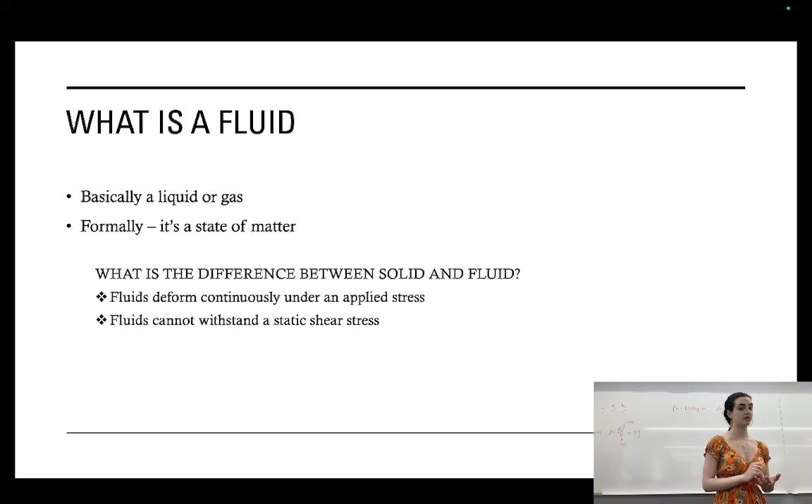Okay, so important concept number one is that fluids deform continuously under an applied stress and they cannot withstand static shear stress. So shear stress is a really important concept for the first part of this course. So yes, what is fluid? So then we get into fluid properties.

So density, obviously a very important one. I wrote the formula up here. Density is the Greek letter rho, so it's kind of like a curvy P. Make sure you make it abundantly clear that it's a curvy P and not a P, because P will be pressure. So make sure your rho is rounded. And that is mass over volume with the units kilograms over meters cubed. So important value, density of water, easy number, 1,000. Keep that locked away in your brain. Density of water is 1,000.

So another fluid property is compressibility. In this course, we treat fluids as incompressible. So you always would assume that, not that deep, just keep that in your mind. There's the formula for compressibility. I don't remember ever actually having to use it, but I guess it's just good to know. Yeah.

Okay, the next one is surface tension. So surface tension is pretty much, if you think about a body of water, the way that the molecules are actually sticking together, and tension is sigma, so it's work per unit area. Yeah.

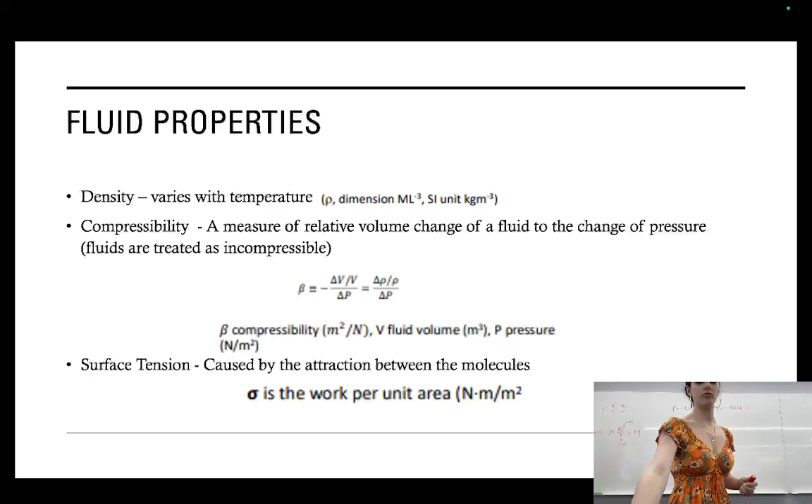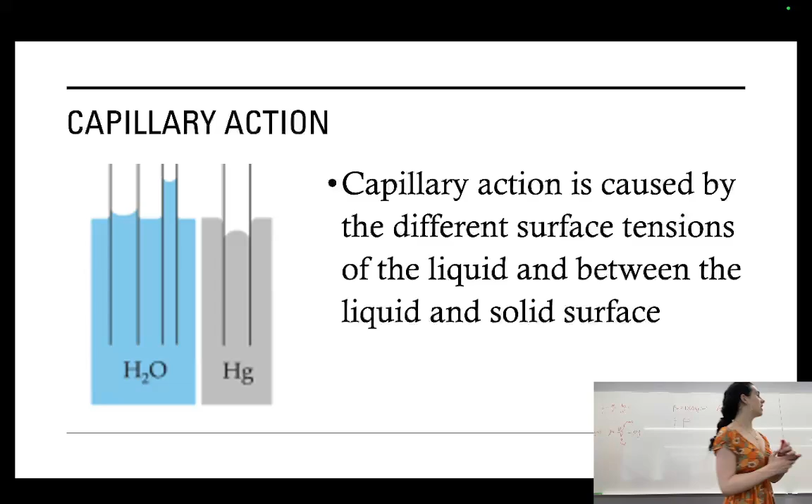So here's more of a theoretical concept, I guess, called capillary action. If you look over here, you'll see with the water, we've got this curve here, right? It's curved upwards. But for the mercury, it's curved downwards. That's because the attraction between the water and the glass is stronger than the attraction between the water molecules themselves. So the water grabs onto the glass. Whereas with the mercury, they're more attracted to each other, so they pull downwards and create this little curve here, like a frown face.

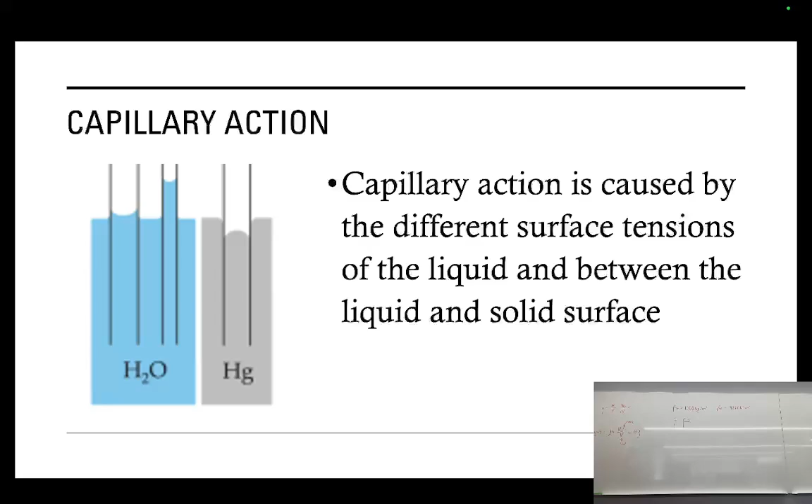So yeah, it's caused by the different surface tensions of the liquid and between the liquid and the solid surface. You won't ever really need to apply that, but it's an important concept to understand that just because something's a liquid doesn't mean they're all going to act in the same sort of way. But you're mainly going to be dealing with water. We're not dealing with mercury flowing through pipes.

So the first important concept with formulas you'll actually use is viscosity. The formal definition is that it's a measure of a fluid's resistance to flow. The most common example would be water and honey, right? Both liquids, but if I pour water, it's just going to come straight out. But if I start to pour honey, it's going to fall at a slower rate. And that's pretty much because there's internal friction.

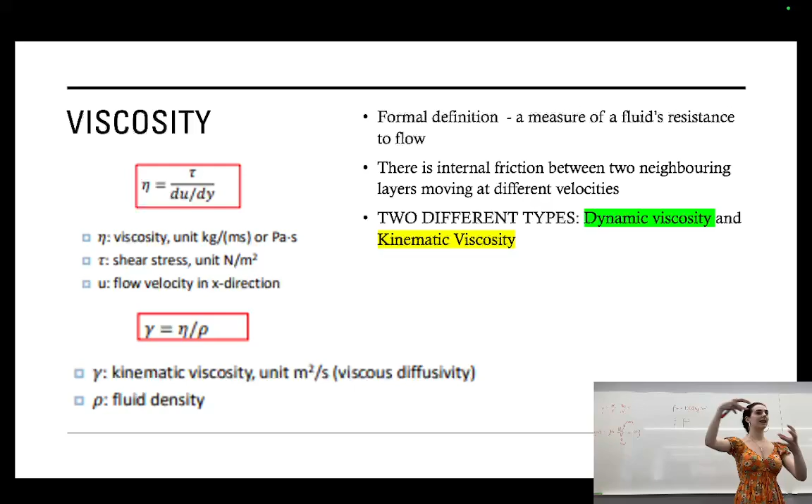And what I mean by internal friction is that within that section of liquid, the layers of the liquid, think about the fact that honey is sticky, right? The layers of honey are literally sticking to each other. So when they're falling, there's more friction, so it's happening at a slower rate. So there are two different types of viscosity that you're gonna see.

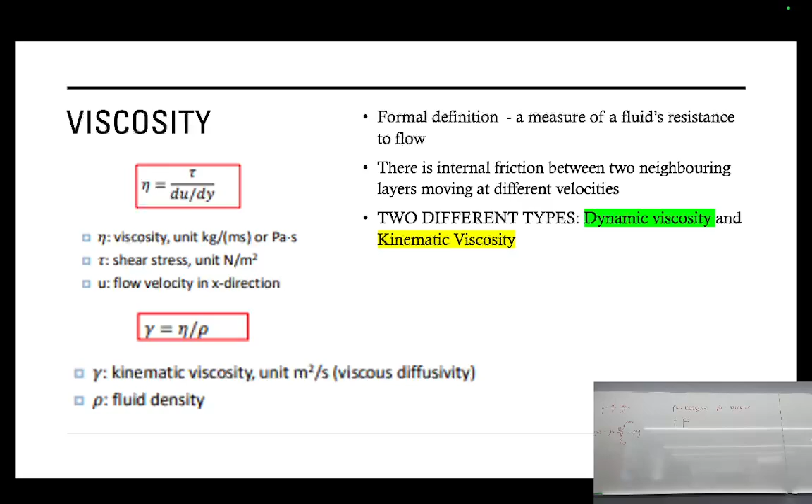The first one is dynamic viscosity, and you do need to know this formula. In this case, this formula's got it as a Greek letter, eta, but it can also be written as mu. I think on your formula sheet it's mu, but don't be thrown if you see that, it's the same thing. So dynamic viscosity is shear stress, tau, over du/dy. And then we've got kinematic viscosity, which is the dynamic viscosity over the density. They're not particularly difficult formulas, but you do need to know them.

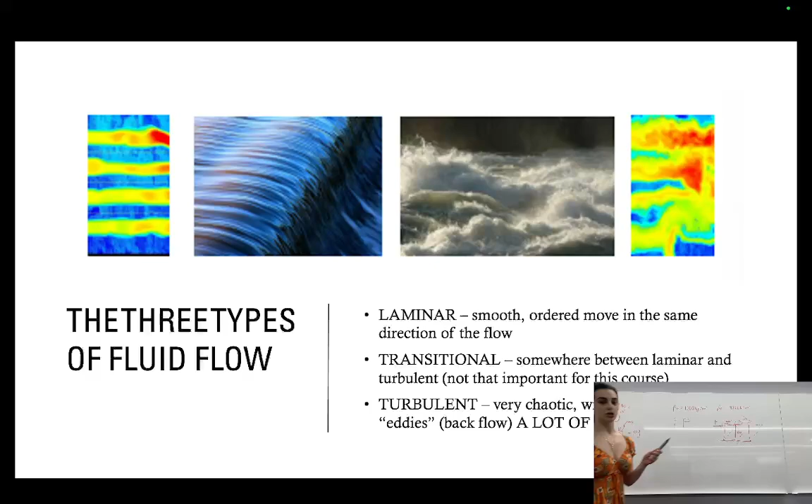It's pretty chill. Okay. So you can have different sort of scenarios. You can have, like, pretend this is a fixed plate up the top here, a fixed plate down the bottom here, or maybe just a plate in the middle. There are a couple different scenarios you can get, but overall it's not particularly difficult. So now there are 3 different types of fluid flow.

So they are laminar, transitional, and turbulent. The 2 most important ones are laminar and turbulent. Transitional is a bit weird. In terms of smooth flow to turbulent, if it's a range, it's quite a small middle section, and the math for it is really complicated because at what point is it really transitional. So you won't get a question on that, but it's important to know that there does exist a middle between laminar and turbulent. So laminar flow is this one over here.

So you can see the water smooth, flowing in one direction. There's no mixing. So that's just like water, if you open your tap, flows one direction, smooth, normal water. Then you've got turbulent flow, which would be like whitewash in the ocean, yeah? You can see it kind of curls in, there's mixing, it's all chaotic. Every single particle in that is acting differently.

So one of the key things, you'll learn this at some point, I think it's later in the term, is that we can't properly model turbulent flow on a computer because every single particle acts differently. There's no formula for that, right? So that's why a lot of the math that we do to do with turbulent flow, we sort of generalize it. But it's very chaotic, a lot of swirls, and it's got eddies.

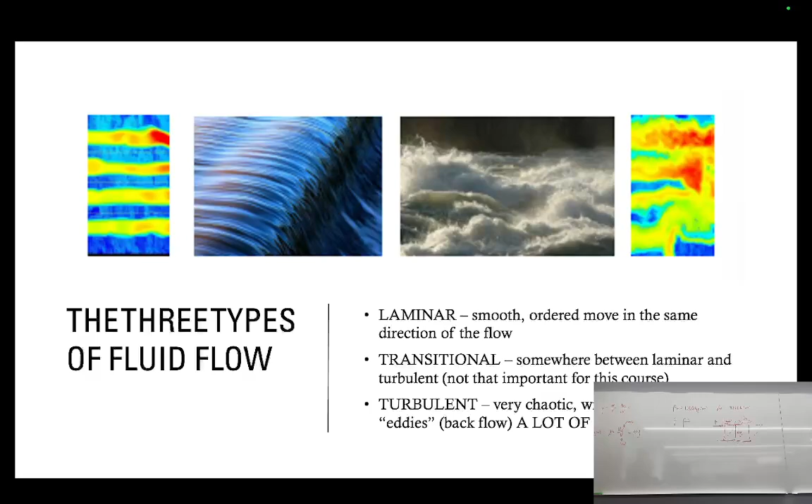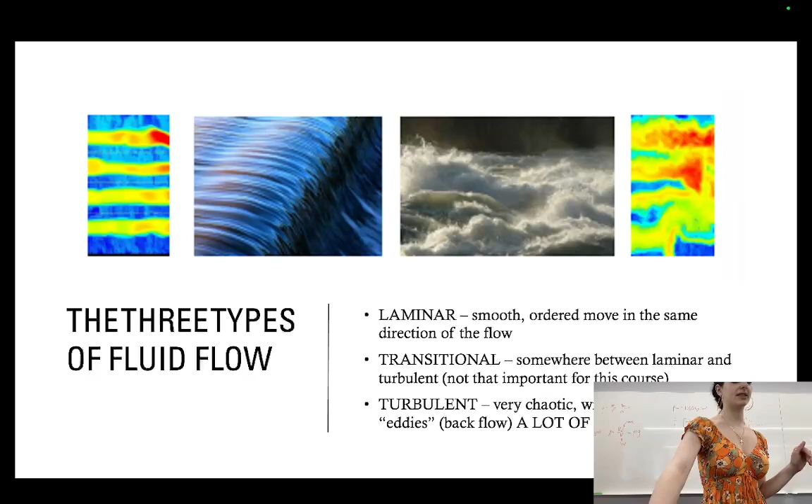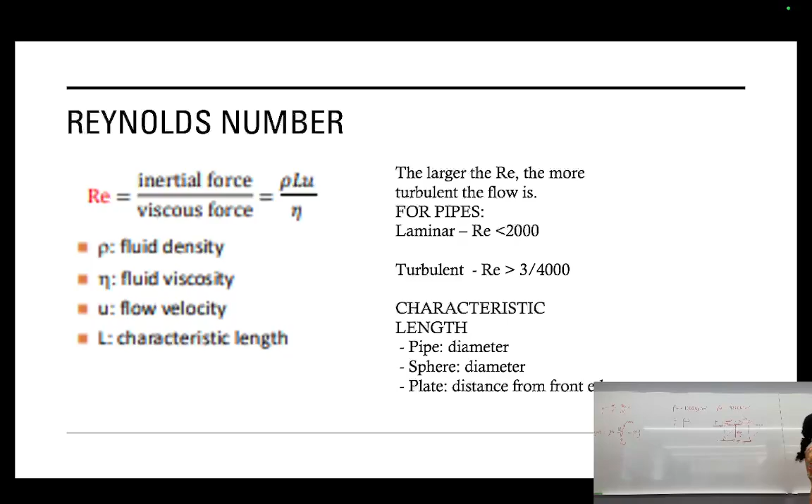So one of the other key differences: laminar flow, no mixing; turbulent flow, a lot of mixing. Okay, here is a very important concept. It's called the Reynolds number. It is pretty much a ratio of inertial forces to viscous forces. That's the theory behind it. What we actually use it for in this course is to determine whether our flow is laminar or turbulent.

Now, if you Google it, there's a couple different values for when something would be considered smooth, turbulent, or all these different ones. General gist is that if your Reynolds number is below 2000, it's laminar. Somewhere above 4000, it'll be turbulent. In your exams, it'll be shockingly obvious which one it is. They're not going to give you something in the middle. It'll be like 1,000 or 500,000. So don't worry, you'll know which one it is. They won't make it iffy for you.

So how do we calculate it? It's this formula over here. It's fluid density times flow velocity times something called characteristic length, which I'll explain a bit later, over your dynamic viscosity. So that is how we calculate Reynolds number.

Characteristic length, that depends on what shape you're talking about. So if you're talking about a pipe, it's your diameter. If you're talking about a sphere, it's also your diameter. If you're talking about a plate, it's the distance from the front edge. So what I mean by that is if we have a plate like this, and there's flow this way, our characteristic length would be this, because this is the front. Does that make sense? Cool.

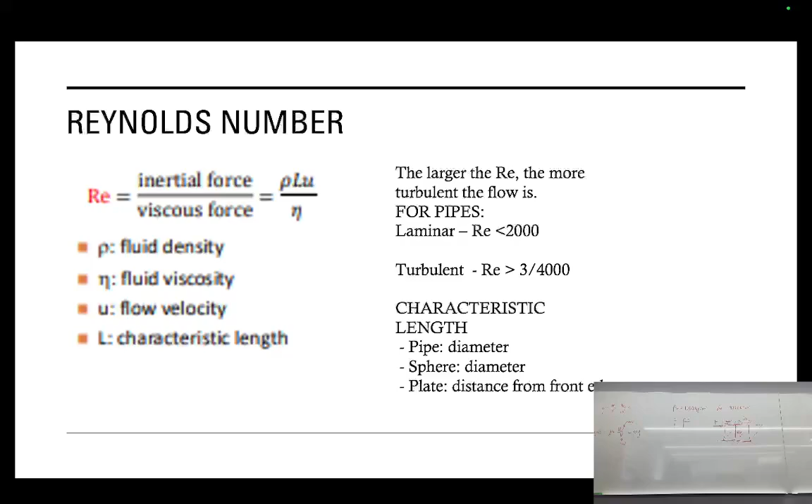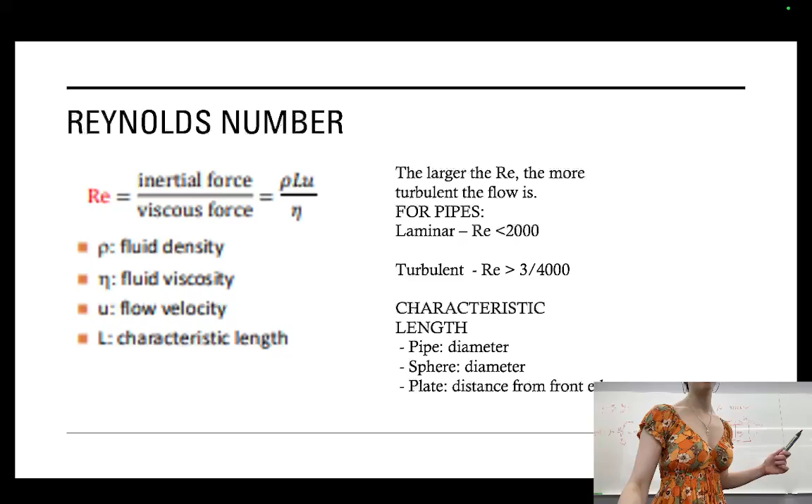So, yeah, that's the formula. You will definitely need to know that. Be good at calculating it and identifying which flow we're talking about. But again, they usually make it shockingly obvious which one. So, we already did this. Newton's law of viscosity. The slide is in the wrong order. Doesn't matter. Here's a good diagram.

So one of the hardest things that I found in this course was being able to visualize those and reading the questions and doing the diagrams. So I highly recommend that in all your tutorials, you practice drawing out the diagrams, because you will get them wrong a lot of the time in the beginning. And they don't have to give you the diagram in the exam. And if you don't have the diagram, then it makes the question really hard. So very much practice drawing this out and understanding, okay, if I'm drawing the front view, then I still got to think about what my depth is and all of that sort of stuff.

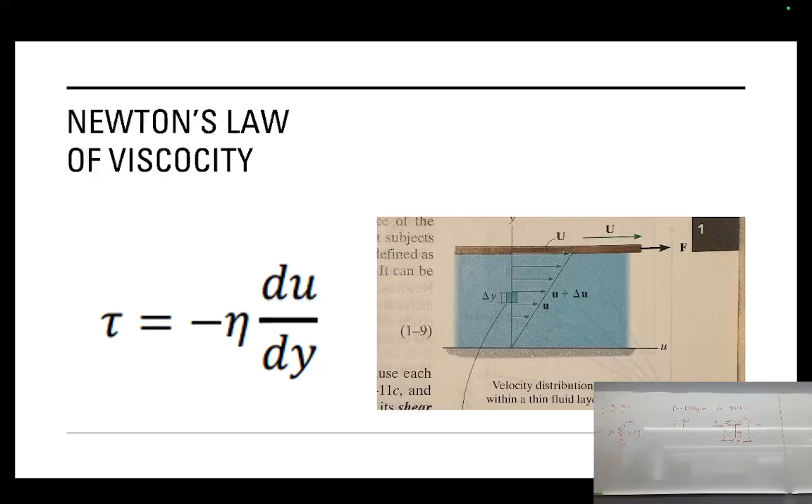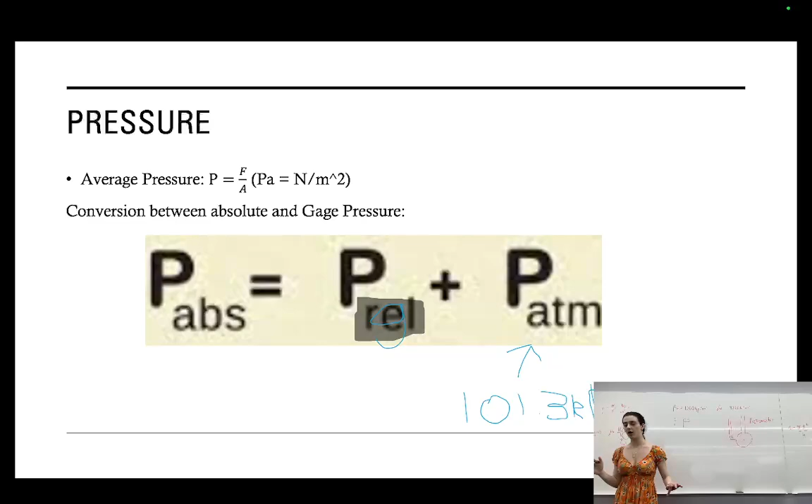Oh yeah, so piezometer, and then maybe you've got another sort of pipe coming out this way here. So that's a piezometer. The spelling might be incorrect. And then you've also got what's called a manometer, which is a bit more funky, but not too much. It tends to be like this, and then maybe the pipe goes down and back up or something like that. So that's a manometer. So they both measure pressure, and important concept, you assume that it's in the middle or the center, if that makes sense. So here and here.

So let's say we have, I'm going to draw this one a bit better. Let's say we have something that goes like that, and then curls back around. Okay, that's a kind of janky drawing, but you see what I mean, yeah? So this is A and this is B, okay? So let's say we want to measure the pressure at A or B. So let's relate the pressure in A to the pressure in B.

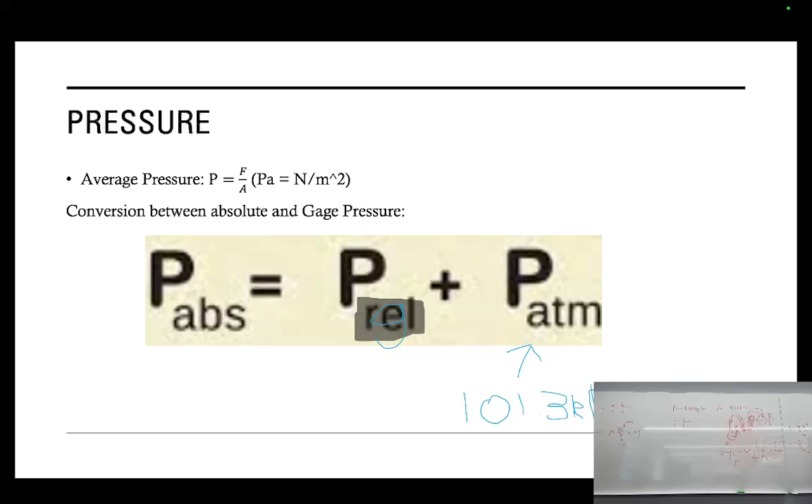Is that okay? So main concept here is the plus or minusing. Think about it, okay, I'm going down, so my pressure is increasing, so I've got to add pressure. I'm going up, I'm losing pressure. Cool? Okay.

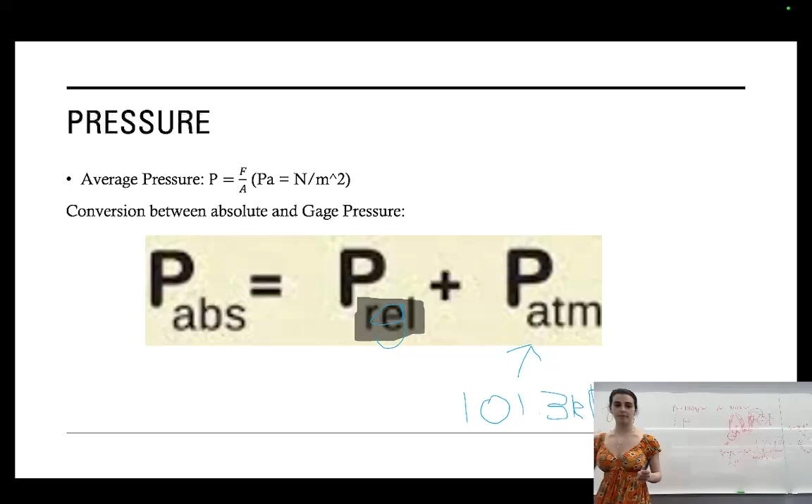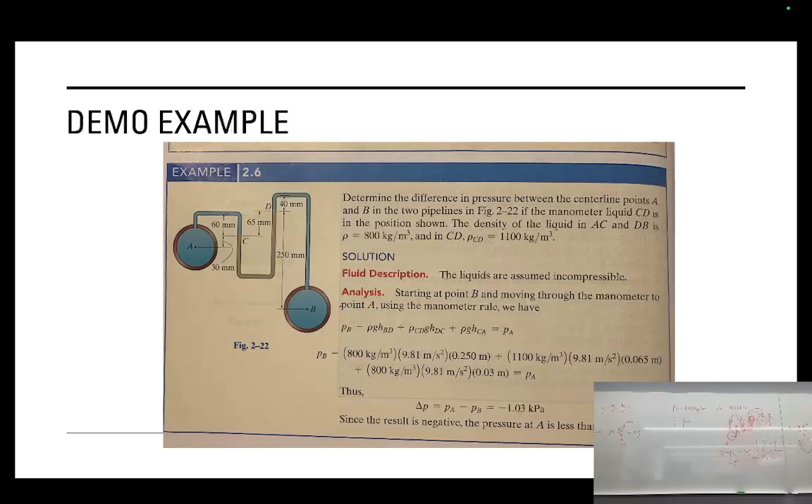And also the final for this is like closed book. Is it closed book for you guys? Maybe it's open book. Mine was closed book. Do you know? I think it was maybe open book. But anyway,

this sort of manometer question, this is as hard as it's going to get. So if you're really good at it, then it can be like 15 marks in your exam. So I would say heavily practice that one. Okay.

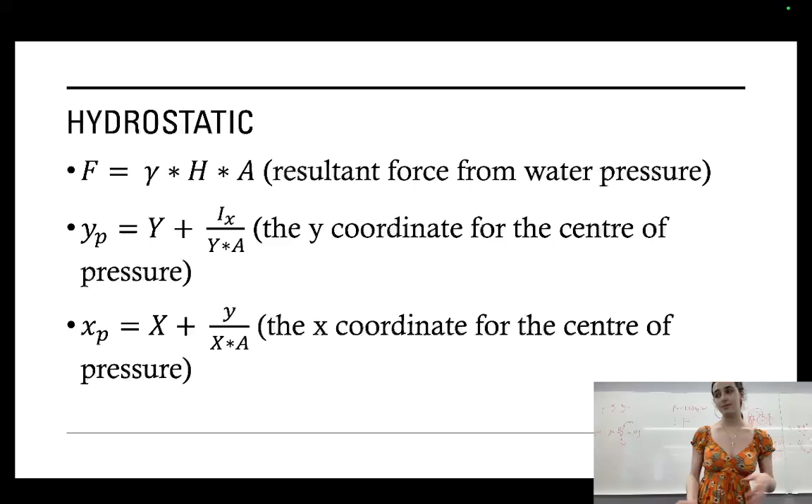So I don't know where hydrostatics is taught in your course, but for ours it's somewhere near the beginning. What hydrostatics pretty much means is if something's under the water and it's still and just staying there. You can also hear terms like forces on a submerged body. So just think about if you had a ball in the ocean and you pushed it down and it stayed there: what are the water pressures, what are the forces, all that sort of stuff.

So when we're talking about hydrostatics, there are three important things that you're usually going to need to calculate. Very important formulas. First thing, the resultant force from the water pressure. When something is being pushed under the water, there is pressure from the water, right? So that is our unit weight times H. Sometimes it's big H, sometimes it's H bar, an H with a little line on top. That pretty much means just the height, how far down it is, and then the surface area.

Then we also usually want to know where on our submerged body this force is actually occurring, right? So we need to find the X and Y coordinate. This formula looks tricky, but it's not too bad. It's the Y distance plus moment of inertia over that Y distance times A. And usually they are only going to ask you for the Y coordinate. They can theoretically ask you to find the X one, but it's more rare.

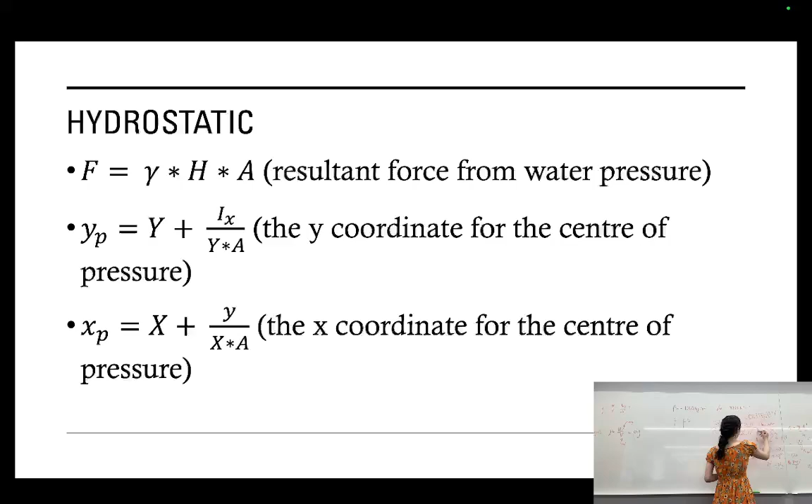Oh, okay. Here's a bit of a theoretical thing I forgot to put in the slides. There's something called a control volume. Pretty much, it's just what you've determined to be the volume that you're looking at. So in this case, your control volume would be this whole thing here. I don't know, it's kind of a useless concept, but whatever. Okay.

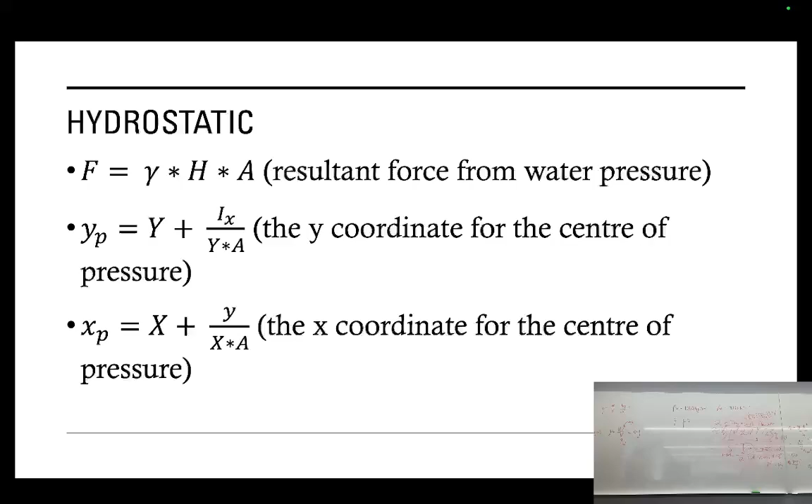Here's a good example of a hydrostatic. So, let's say we've got this weird little bucket thing and we fill it with water. This is on an inclined angle, right? I wiped it off, but it was like the inclined angle example. Normally they would give you this and you'd have to draw your diagram, okay? So, that's a bit hard. Let's try.

So, you've got to draw it from this front plate's perspective. That's how you draw the diagram. The way you would actually draw this is you would draw, first of all, that incline. So this line here is this line here, right? Then you would say the pressure is acting, what's that distance? 3. So this here is 3, right? And we've got the pressure acting like this. It's like a triangle. Right?

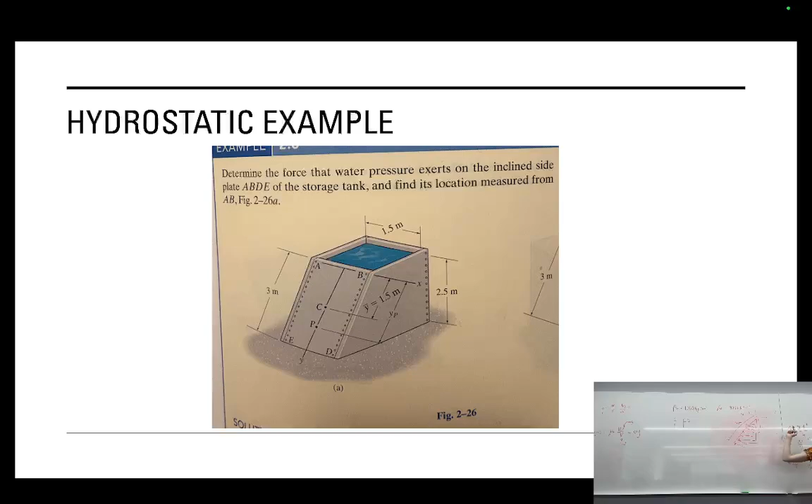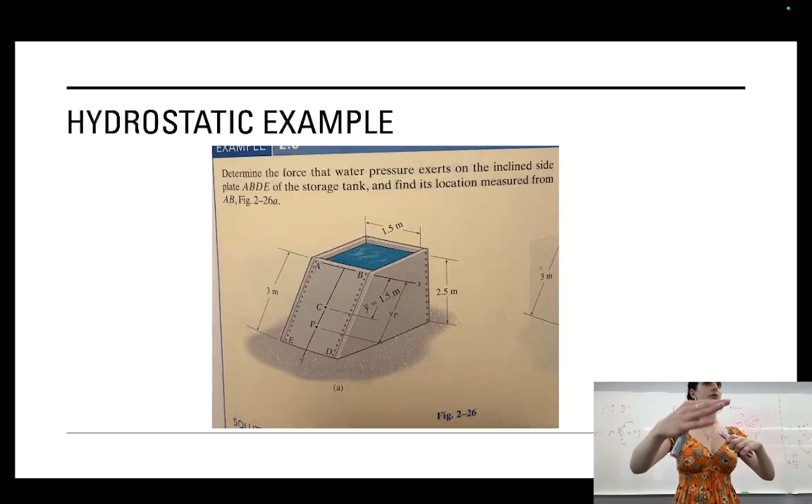And then you would also have to remember about the breadth. You don't need to draw that on your diagram, but when you're calculating your area, that would be an important concept. Is that okay? So that diagram's good to show you what it looks like when it has that breadth. It always has it, but usually you don't really get to see it, I guess.

Okay, here's a random concept that sometimes gets assessed and sometimes doesn't. It's called buoyancy. I can't remember which scientist did this, but allegedly some dude sat in a bathtub and was like, crazy, when I go in the bathtub, the water goes up. Why does that happen? My volume has displaced a certain amount of volume within that bathtub, right? So kind of like how big ships or glaciers stand, right? Why don't they just sink? Because there's actually something called the buoyant force holding it up.

And the way you calculate it is the force is equal to density of the fluid times V, and this volume is not the volume of the whole object. So let's say I have water like this, and I've got a rectangle here that's half in, half out. The volume would just be the half that's under the water. It's the displaced volume, not the volume of the whole object. If the whole object is underneath the water, then yes, it would be that volume. But if it's partially in, partially out, it would just be the displaced water volume times gravity. Does that make sense?

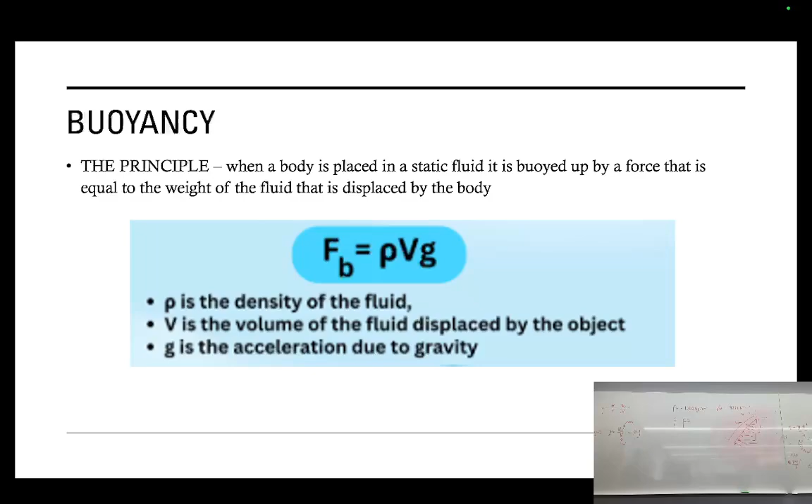Does that make sense? So the big concept here is don't get the V mixed up. I know I keep saying it, but it's because everyone does that. It's the volume of what is underneath the water, not the entire object. Yeah, sometimes it gets assessed, sometimes it doesn't. It just depends, I guess.

Okay, here is personally what I think is the most important part of the course. So, my favorite equation in the whole entire universe, the Bernoulli equation. Such a beautiful, sexy looking equation.

So, it's pressure. Why are you shaking your head? Do you not agree, Kaden? It's actually like it's the best equation, guys. Oh my god, I'm obsessed. So,

So the Bernoulli equation is somewhat special because in this case, we assume that there's no energy loss through the pipe. But think about it, if water's going through a pipe, there is energy loss, right? There's going to be friction between the pipe and the water. When it's entering and exiting a pipe, there's loss there, all these different things. But such a beautiful, crazy, sexy looking equation.

It's also equal to some sort of constant. Sometimes it's usually written as head. So it'd be like P plus whatever, blah, blah, blah, is equal to H. You might see it written like that. And that is referring to total head. So it's just equal to some sort of constant, I guess.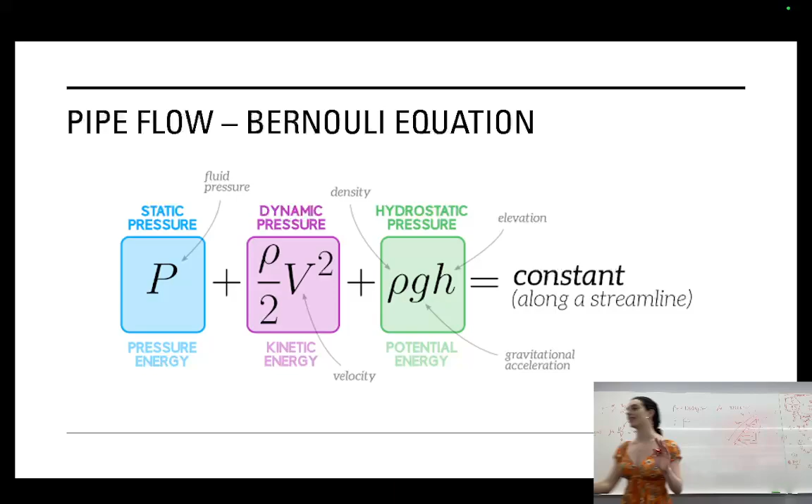To be completely honest, I never really understood what they meant by head, but I can tell you what they are. This section here with the P is your pressure head. Again, don't ask me what they mean by head, I never fully got it, but I guess it's just a concept. So pressure head, this is your velocity head, and this is your elevation head.

So if you have your pressure head plus your velocity head plus your elevation head, that equals total head. How exciting. Very strange. I don't know why it's called head, but such is life. I don't know.

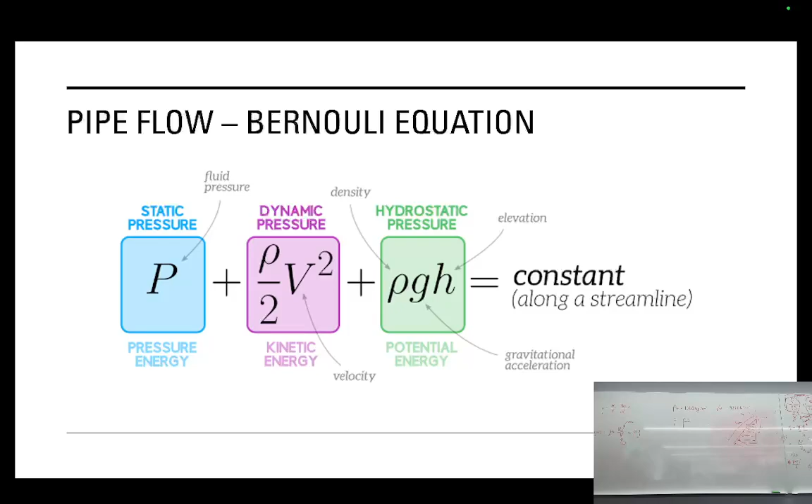Okay, so yes, this one assumes no energy loss. So this is a really good example. Water flows through a pipe at A, which is the one at the top, at 6 meters per second. Determine the pressure at A and the velocity of the water at its exit at B. So we're going to use the Bernoulli equation. So what you would do is, I always wrote out the full equation.

So the total head at A is going to be equivalent to the total head at B. So you would have the pressure at A over density times gravity plus the velocity at A squared over 2g plus ZA is equal to the pressure at B over density times gravity plus the velocity at B squared over 2g plus ZB. Write out the full thing like that, okay? Then sub in what you know.

So we want to find pressure at A. Well, we know density and gravity, right? We know the velocity at A. We know this. So our ZA, I'm going to make my datum this line here, and assume your datum goes through the middle of the pipe. Always assume middle of the pipe. So my datum's here.

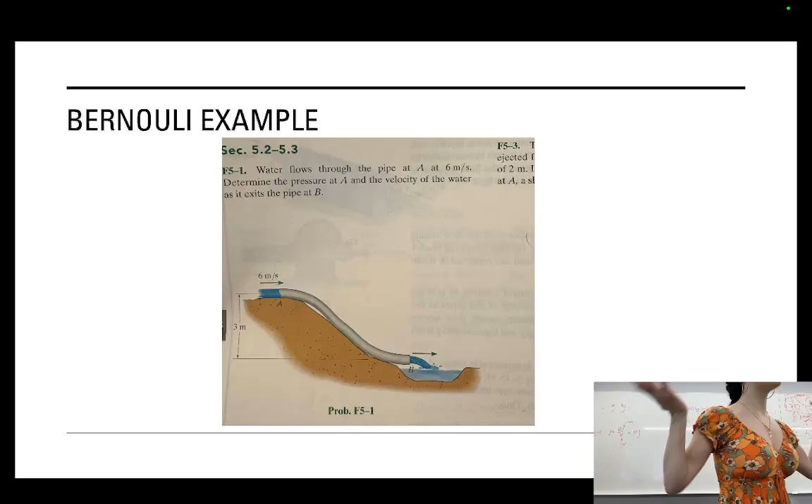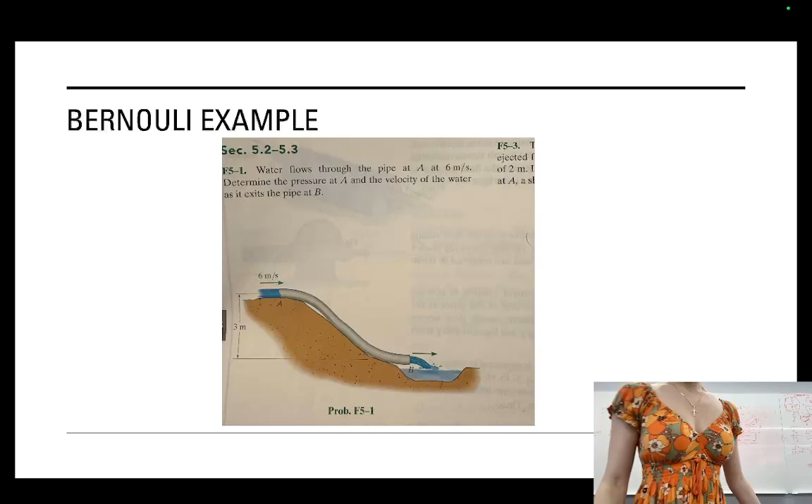Cool. So that is a special type of question because we assume that there's no loss. We assume that there's no friction between the water and the pipe. We assume that there's no extra loss at the entry or the exit point. So unfortunately, life is not like that. So this is actually the full equation, such a plot twist. Same thing, except you add on this thing, HL. That stands for head loss. It'll usually be written as HL, sometimes big HL, doesn't really matter that much. So let me just triple check I've got the friction formula.

So what makes up your head loss is a couple of things. It's your friction and your entry and exit. Those are the three, so entry, exit, and any janky movements in the pipe. And what I mean by janky movements is if your pipe goes like janky movement, yeah? Weird, not nice, would create extra energy loss. Sorry guys, I forgot the formula for that, one moment. So all of these things add up to your head loss.

We also have these things called pumps and I think turbines. So if you get a system that includes a pump or a turbine, a pump is easy, pumps energy into the system. Turbine takes energy out of the system. So you would put your pump on your original side and your turbine on the side with your head loss because it's taking energy out. Head loss is taking energy out. But low-key, I don't remember that coming up in the exam, unless I just forgot, which is also a fair possibility.

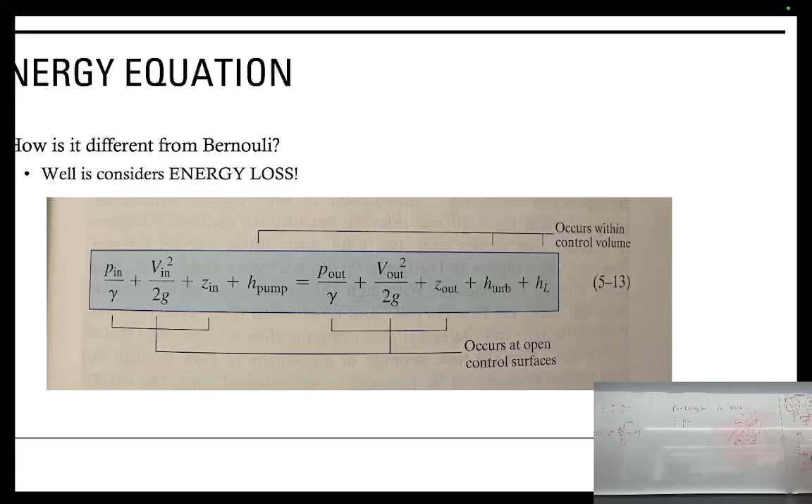Get really good at that so that when you tackle this extra stuff on top, you're not learning the entire concept in one go. It just makes your life so much easier. That's low-key all I had prepared. Let me look at Farhan's notes to see if there's anything extra I should add.

The one topic I very much did not include because I hated it was dimensional analysis. So you're totally on your own for that one. That topic sucks, okay? So weird, so useless, so unnecessary. Yeah, that's kind of it. Is that all okay? Cool.

It's a good course, guys. Trust. It's a good course. You guys all take it.

Side note, this sounds weird, but it's worth going to the library, borrowing the textbook and practicing the questions from it, because as someone who did that, two of the questions they just take from the textbook. You can borrow it from the library for free, it's pretty good practice, and it has worked examples and stuff.

Oh, I have it with me. I actually haven't returned it since week 1. So that's the textbook there. There are like 5 copies in the library, and it's got worked examples and stuff. So I highly recommend borrowing that one, once I return it and probably pay a $20 late fee. Thank you.